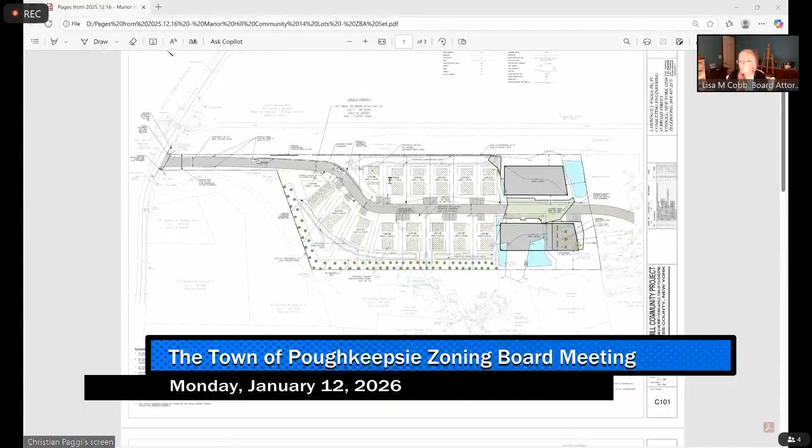So the area surrounding the property consists of commercial, residential, and recreational uses, of course, with the existing mobile home park next door. Back in December, the town board reclassified the property from the R20 zoning district, which is a residence district, to the RMH, or mobile home zoning district. This followed numerous hearings before the planning board and the town board in connection with the application. For your consideration, while this would be considered a Type 2 action before your board, exempt from SEQR as it relates only to setbacks for a few of the lots, which Christian will show you in a minute, the planning board that served as lead agency for the coordinated review between the town board and other involved agencies did adopt a negative declaration, which is a Type 1 action collectively, which also considered the variances.

So as part of that SEQR determination, the planning board determined that these variances or these setbacks would not have any significant adverse impact on the neighborhood or the community.

As we noted in our submission, we are proposing 14 mobile home units. Each lot would contain a manufactured home with 2 parking spaces, as well as other associated site improvements, a 24-foot wide drive aisle, emergency access, water and sewer connections, screening, landscaping, and open space areas including grills and other outdoor amenities for not only these tenants, but the existing 62 mobile home unit owners, which was a request of the town board during our reclassification process.

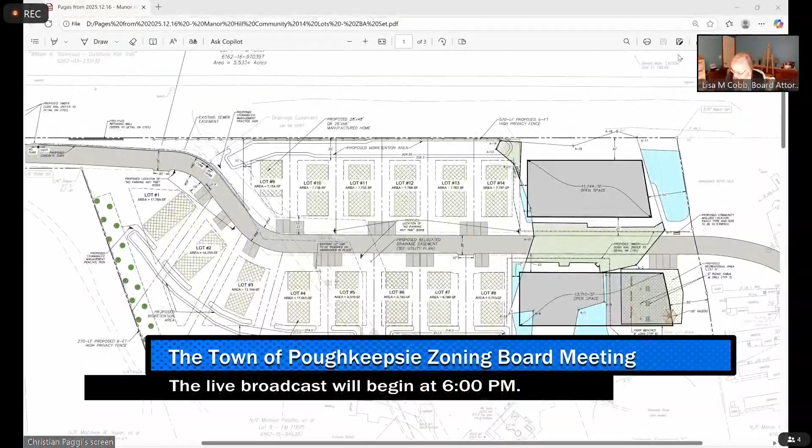The applicant originally proposed 22 total units, and they reduced that down to 14 units as the project evolved, to create additional open spaces, protect wetlands, and make a number of other modifications to reduce it down to the minimum relief necessary before your board. With those amenity areas and the visitor parking that's been added, the applicant has spent a lot of time to really refine this.

So with that history, we are specifically before you tonight regarding section 21083B3 of the town code, and it's only for certain units, which Christian's going to highlight on the screen. On your plan, it's the top of the plan — that's units 9 through 14.

We are proposing a 30-foot setback from what is effectively the rail trail in that area, whereas the code has a unique requirement. Section 21019D provides the general rear yard setback for this district of 10 feet, but it also provides clearance requirements for the mobile homes within the park. It says: each mobile home shall be located on the lot with minimum clearances — side 10 feet, 40 feet from the rear lot lines, 25 feet from access roads, and 30 feet from exterior lots. There are some other details there.

The trigger there is the 30 and 40 foot difference. So while we meet a setback, we don't meet a clearance requirement. Therefore, we are seeking a variance for those specific lots of just 10 feet for those particular parcels.

With that, Christian, maybe just a quick version of that — I know you were highlighting it during the presentation. So I did highlight for the board, hopefully you could see the area we were talking about for lots 9 through 14. The rear property line is adjacent to the Dutchess County Rail Trail, as Taylor mentioned.

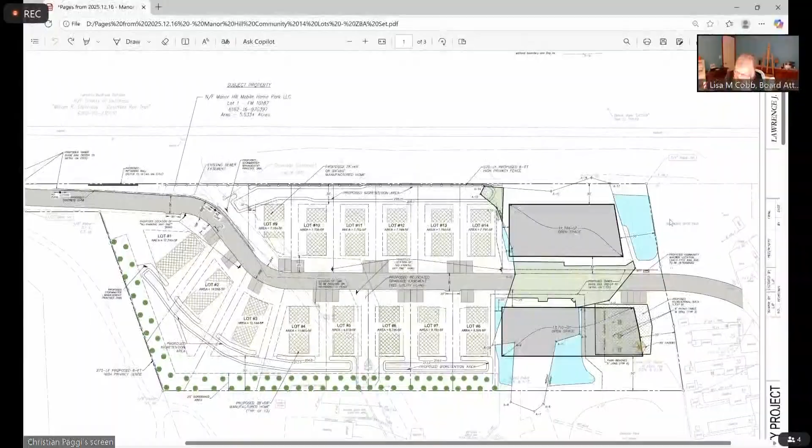But other than that, that was pretty thoroughly explained by Taylor. Can you tell me, from the property line to the actual paved portion of the rail trail, do you know what that distance is? I believe it's 70 feet. 70? Yes. Okay.

And you described a change in topography there — my recollection from our field visit is that from the rail trail, the existing mobile home park is not visible at all. Is that fair to say? Correct, yes. Do you expect this to be any different? You would be looking at a fence through roughly 70 feet of trees, so I don't anticipate you being able to see any units.

All right, anyone from the audience who wishes to comment on this application? And if you'd unshare your screen for just a moment. All right, I don't see anyone on Zoom who wishes to comment on this. Art, still no questions? I'm good.

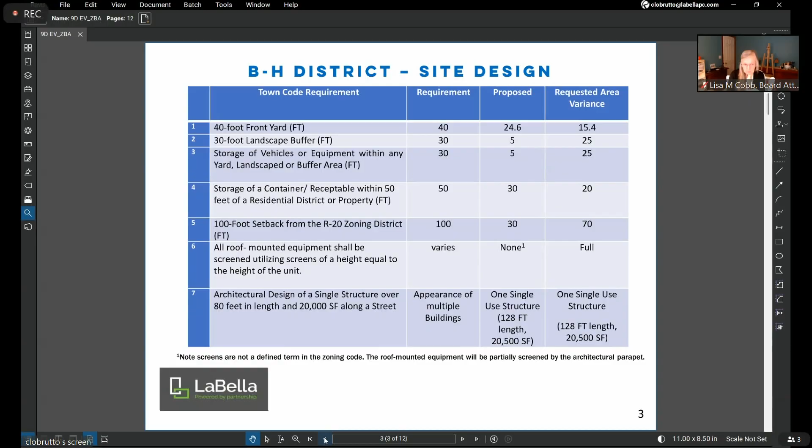This runs through the code sections. I'm sure that's not something we need to get into right at the moment. I can say that we've looked at the urban design of the surrounding area, and we find that the design is somewhat consistent with neighboring tax parcels in regard to parking and refuse within the encroachments.

I do note that the site is heavily constricted by existing sewer easements, existing cross-access easements, and archaeological resources. The town has declared a desire for a sidewalk on Route 9D, which the applicant is trying to make into a reality, which would necessitate a land donation.

The land donation requires that we give approximately 40 feet of the frontage of the site off 9D to the state for the use of a sidewalk. Because we're changing our front property line, now we have our building in the front setback. So there's some connection between those things.

The operations necessitate a number of parking spaces. They anticipate 50-plus repair appointments per day. Sometimes vehicles are held for other repair needs over the course of a few days, and then of course they have to wait being picked up.

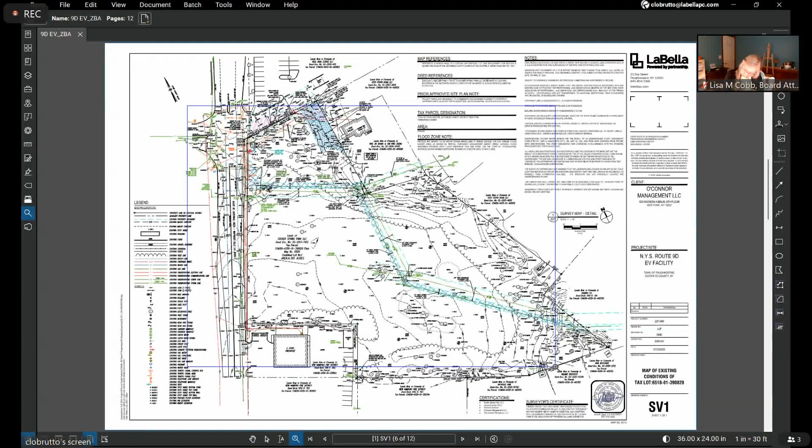So here is the existing conditions survey. I wanted to draw out a little bit - it's pretty hard to read, but this blue hatch through the middle that I'm dragging my cursor along is the sewer easement I was talking about. You can see that it really cuts across. You can't put anything of fixed value on top of the sewer easement, because it has to be accessible.

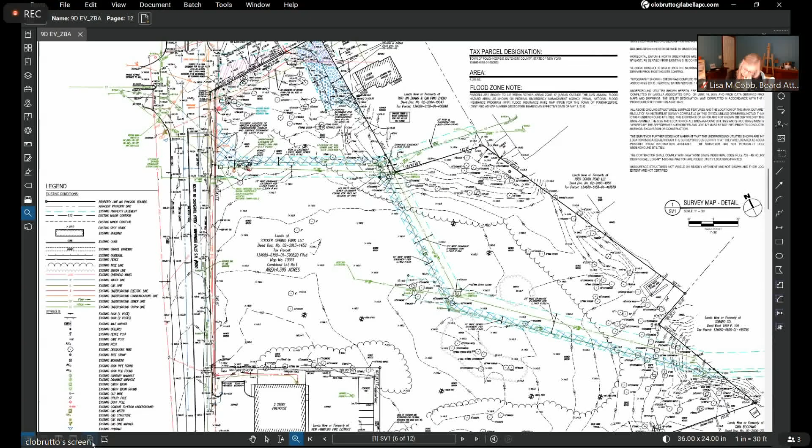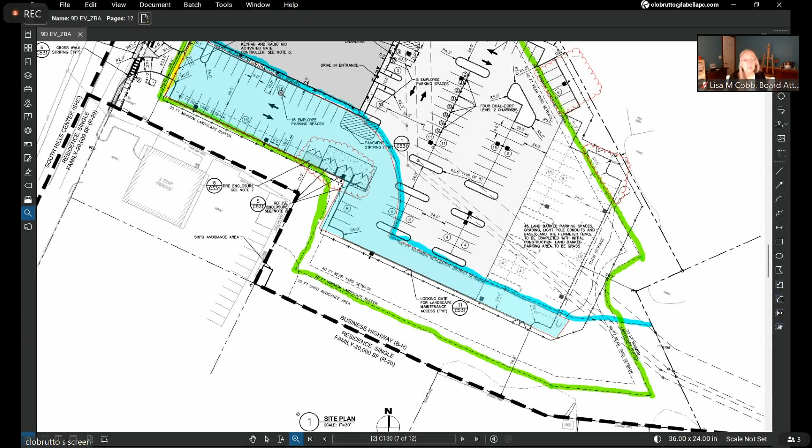So if I skip to this, I've tried to mark out how these variances come into play. The green highlight is the 30-foot minimum landscape buffer. The blue highlighted area is the 100-foot setback from the residential district. And over here, the yellow highlight is the 40-foot front yard setback.

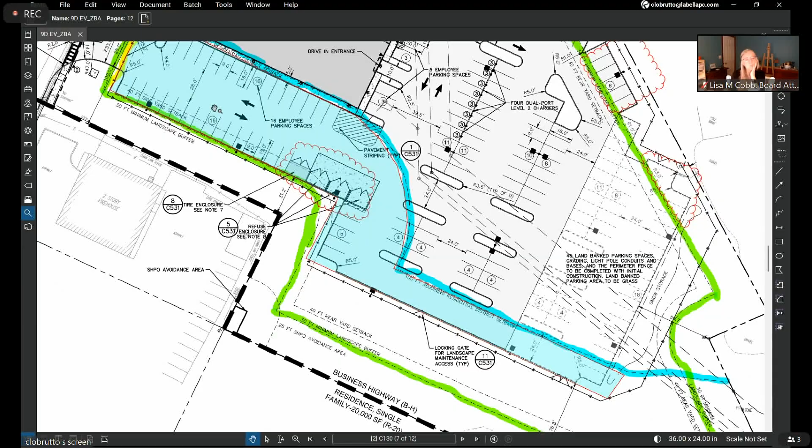You can see right here off of 9D we have the display vehicle and parking spaces. As you go around the perimeter of the site, you see where we have parking spaces encroaching, again over here, and again here at the rear of the site, and just odds and ends places. Over here where it abuts the residential district, the 100-foot buffer is this blue line, and I've done an overlay showing the area within that 100 feet. The landscape buffer shows some of the same encroachments.

That's just a brief summary of what we're asking for. I've gone through the reasoning on it. I don't know if you want me to discuss anything in particular, or if you want to ask questions now.

Yeah, could you address this thing about the display vehicle? There was a comment that came in, I think from Christy, regarding the display vehicle, saying that we would need a variance because we had a vehicle that was inoperable for over a certain number of days on the site. Our understanding of the code was that this is not an inoperable vehicle. The display vehicle will be operable. It can be taken down and driven away. It's not like a salvage vehicle, for instance.

The display vehicle is encroaching, for sure. It's right here off of Route 9. But it's actually not the most egregious encroachment—that's the parking. So it's included within a variance that we'll be requesting, but it's not the primary reason for it.

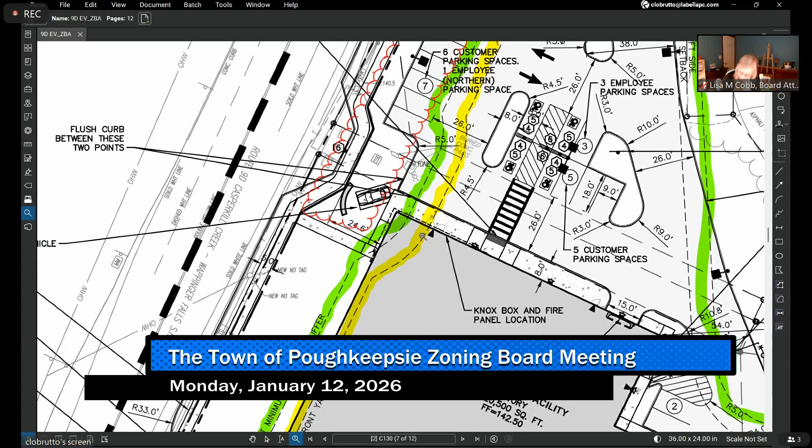What's the purpose of the display vehicle? It's part of their branding—I think they just feel it's part of the image they want to put forth on Route 9.

Well, it seems like there's a lot of variances required, but I see your explanation for them, so I don't really have any questions. Christine?

Can you just explain to me what would be backing into the residential area? Would that be parking spaces? Sure, I'm trying to see—yep, sorry, let me just.

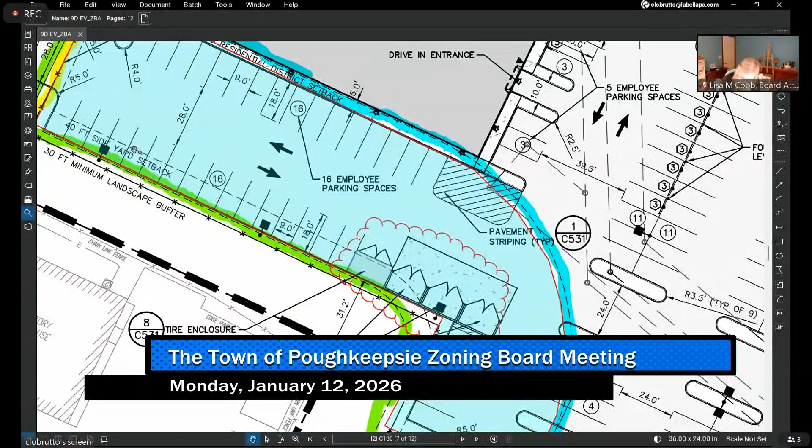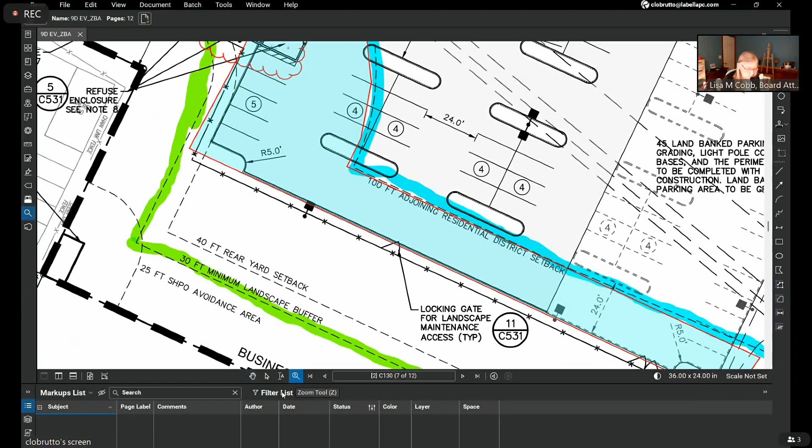So yes, it would be largely parking spaces. We would have landscaping all in this area. This, of course, is the firehouse that's there presently, and the residential district and residential uses—let me just zoom out a little. Let's see, trying to remember how to get this. That's not what I wanted to do. That's bigger—there we go. Okay.

So the residential district is down here, right? We'll have quite a bit of mostly evergreen mixed with some deciduous landscaping in this area. But primarily it's the parking, and then there is some refuse—there's a refuse enclosure and a tire enclosure. Okay, thank you.

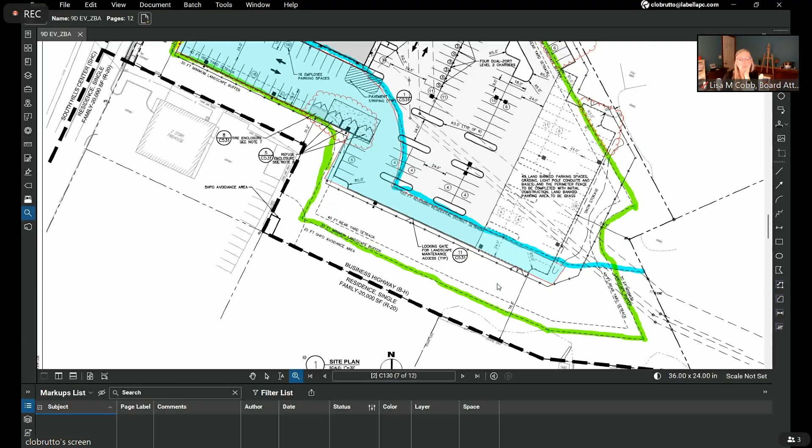Art? Are you showing all those parking spots behind the building? How many parking areas are you proposing? It's a total of 140 parking spaces. This is for what, sales? Sales and service, or just service? No, it's just for repairs. And you need 100-plus parking places for repairs?

Yeah, they estimate—I think it's 50, hold on a second, I have it here. Yes, there have been lots of questions about the parking, and the operations guys at Tesla have explained that there's 50-plus repair appointments per day, plus vehicles being held for repair and vehicles awaiting pickup. This is the number that they came up with, that they couldn't live without.

The planning board's had a number of questions about the amount of parking, and some portion of that would be land banked, at least initially, right? In addition—so it's 140 starting, and then 45, I think, land banked. So we can't really speak to that yet because the planning board's not decided. Correct, right. I mean, some of those variances might be smaller if the parking were pulled back away, a little bit. Right, if the parking were reduced, or the building was reduced, then yeah, it might bring the parking in from the encroachments.

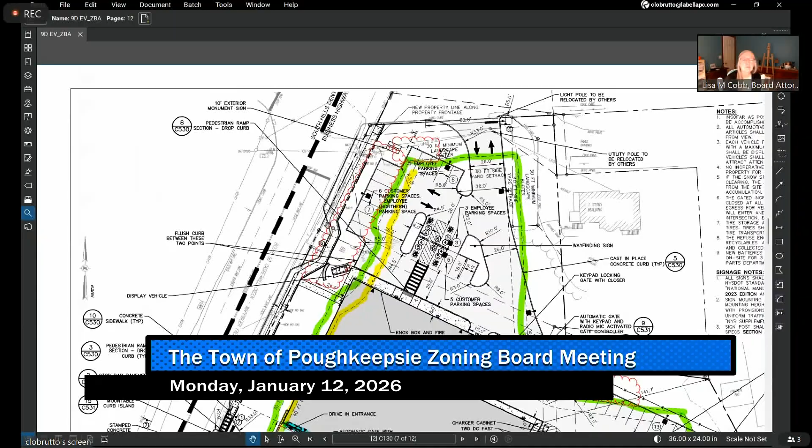So let me see here. And that would be the main access, would be from the Staples, right? That's correct - the main access would be at this intersection here. Where the traffic light is? Yeah, where the traffic light is. And then this access here is right-in, right-out only. It's for trucks and emergency vehicles.

I'm sorry, Tony. No, I'm good. Go ahead. How much noise emanates from all of this repair, and how is that managed? That happens entirely indoors. Like I said, there's no collision repair happening, so it's not like a major repair facility from that standpoint.

But I'm sure I anticipate that they have lifts. My understanding is, from a repair facility standpoint, it's not the heavy lifting of repair. So I don't anticipate there would be a lot of noise, but we'll respond to that and make sure we have a clearer answer going forward.

Anything else? Larry? No questions. Linda? The 45 land-banked spaces - it says maintained as grass? Yes. So does that mean they're not gonna be used? Not as part of this facility.

They're basically being built in because it's more efficient from a construction standpoint at this time, and it's also a better fit from a stormwater management standpoint to have it all constructed together. But it'll be constructed underground to support parking, and then they'll just drop a foot or two of topsoil on top and seed it. It won't be used.